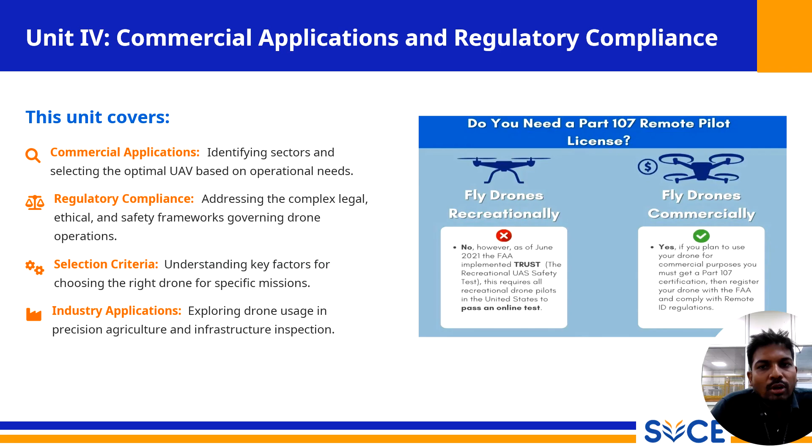Finally, you must comply with the Remote ID regulation. Remote ID is often called the digital license plate for drones. It requires the drone to broadcast identification and location information that can be received by others. This is a crucial technology for ensuring the safety and security of the national airspace, allowing the authorities and other aircraft to know who is flying where. So, the takeaway is clear. The moment you cross the line from hobbyist to business, a new and more rigorous set of rules applies, all designed to ensure safe and accountable commercial operations.

Now that we have established the legal foundation required to operate the drone commercially, the next critical step is choosing the right tool for the job. This slide introduces the most important principle in drone selection. The entire process is mission driven. There is no single best drone for every task. The optimal choice is always the one that is specifically tailored to the needs of your mission and the environment you will be operating in. The drone that is perfect for cinematic photography might be completely unsuitable for long-range agricultural surveying. Therefore, we must begin by analyzing the mission requirements and then match drone capabilities to those needs. Let's break down the key selection factors you see listed here.

First, we have range and endurance. This refers to how far the drone can fly from its operator and how long it can stay in the air on a single battery or tank of fuel. For missions that cover large areas, such as mapping a coastline or monitoring a long pipeline, you would prioritize a drone with extensive range and flight time. As the slide notes, this is where configurations like fixed wing aircraft often excel due to their aerodynamic efficiency.

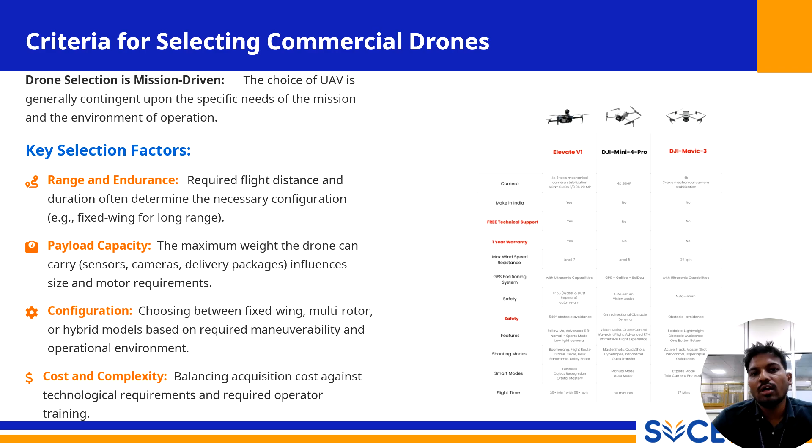The next is payload capacity. The payload is anything the drone carries to perform its mission. This could be a high resolution camera for inspecting, a multispectral sensor for analyzing crop health, or even a package for delivery. The weight of this payload is a crucial factor as it directly influences the required size, power, and cost of the drone. A heavier payload necessitates more powerful motors and a larger frame. This in turn impacts the drone's overall endurance and budget.

The third factor is the drone's configuration. This is the basic design of the aircraft, and we'll explore this in more detail in the upcoming slides. The primary choice is between a fixed wing model, which is like a small airplane, a multi-rotor model like the familiar quadcopter, or a hybrid design that attempts to combine the benefits of both. Your choice will depend on whether the mission requires hovering stability, vertical takeoff and landing, or long distance efficiency.

Finally, we have the practical consideration of cost and complexity. The initial purchase price is only part of the equation. You must also account for the total cost of ownership, including maintenance, software, insurance, and the necessary level of pilot training. A highly sophisticated drone may offer incredible capability, but it also demands a more significant investment in both money and skill development.

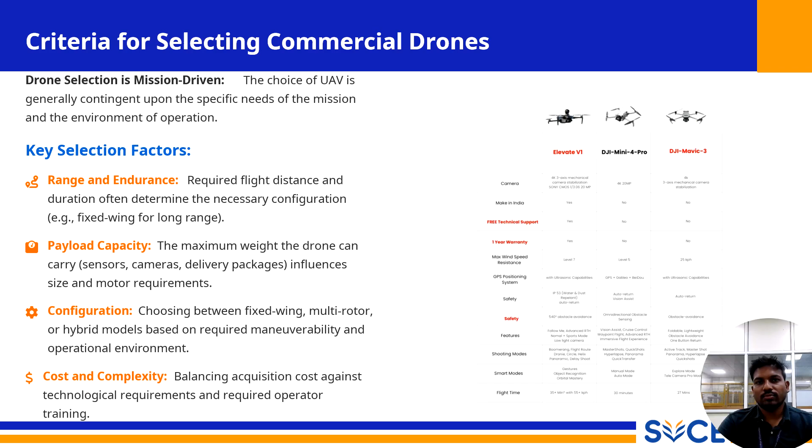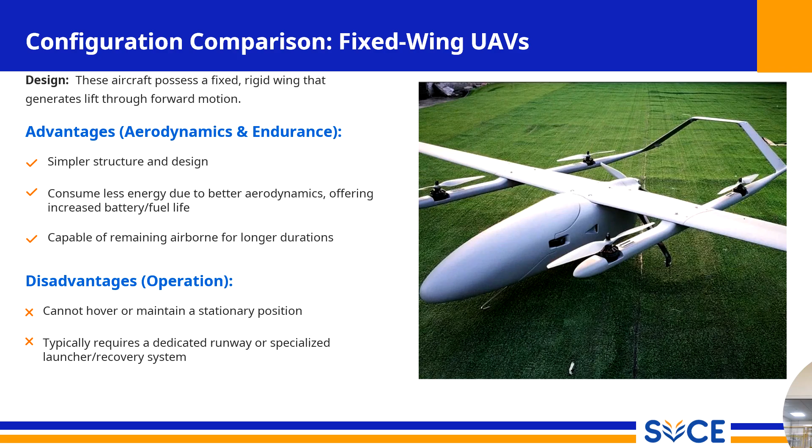First, let's look at the technical challenges. This industry is in a constant push for increased reliability, extended capabilities, and improved ease of use. Increased reliability is absolutely critical. For drones to be trusted with valuable payloads or to operate in close proximity to people and infrastructure, they must be exceptionally dependable. This means designing systems that are resilient to component failure, software glitches, and environmental factors like high wind or signal loss.

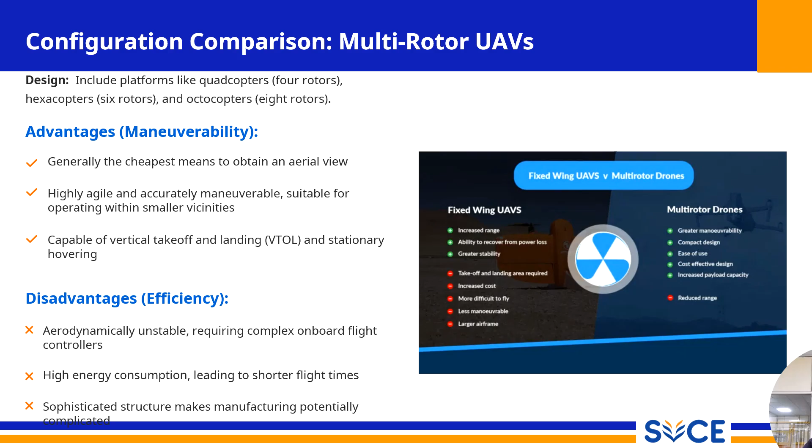First, we have the fundamental system components. This starts with the most obvious part, the unmanned aircraft itself, which is the physical airframe. This includes the body, wings or arms, motors, propellers, and everything that makes up the physical structure. This is the hardware that actually moves through the air. The brain of this hardware is the autopilot, which is the onboard computer that executes the flight software.

To understand its environment and its own status, the drone relies on a suite of sensors. These are the drone's eyes and ears, which include an inertial measurement unit (IMU) with accelerometer and gyroscope, a GPS for location, a barometer for altitude, and a magnetometer for heading. However, the raw data from these sensors can be noisy or inaccurate.

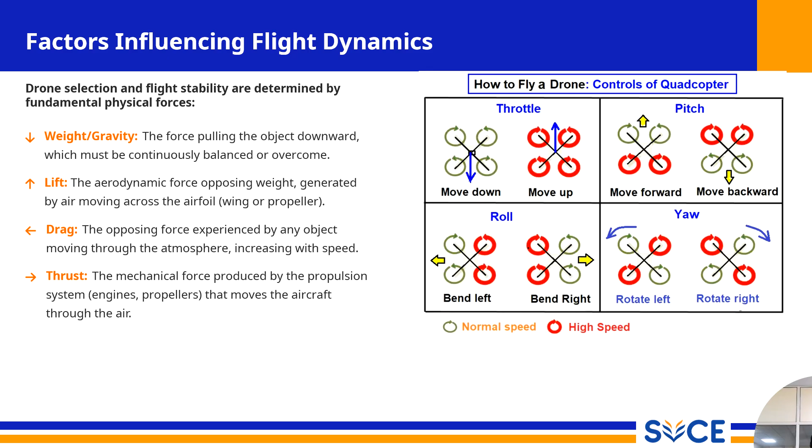This modularity makes the system easier to develop, debug, and upgrade, as engineers can work on individual blocks without having to redesign the entire system. Ultimately, this brings us to the core of our unit: beyond the hardware, our focus will be on the design of the software algorithms that enable autonomous and semi-autonomous flight. It is the sophistication of the software, the state estimators, the planners, and the controllers, that truly defines the capability of the modern MAV.

Having laid out the architecture of the MAV, the next logical question is how we actually design the intelligent software that runs on it. The answer lies in our design philosophy, which is centered on the principle of modeling for control. We cannot control what we cannot describe. Therefore, our first step is always to create a mathematical representation of the drone and its environment. Our process begins by translating the physical system into a simulation. To do this, we need to create a detailed mathematical model that captures every important aspect of drone behavior.

This includes modeling its rigid body kinematics, which describes the geometry of its motion, its position, velocity, and orientation, without considering the forces involved. Next, modeling its dynamics, which is where we apply physics to understand how forces and torques cause the drone to accelerate and rotate. We must develop a model for aerodynamics, which accounts for the complex forces of lift and drag generated as the drone moves through the air.

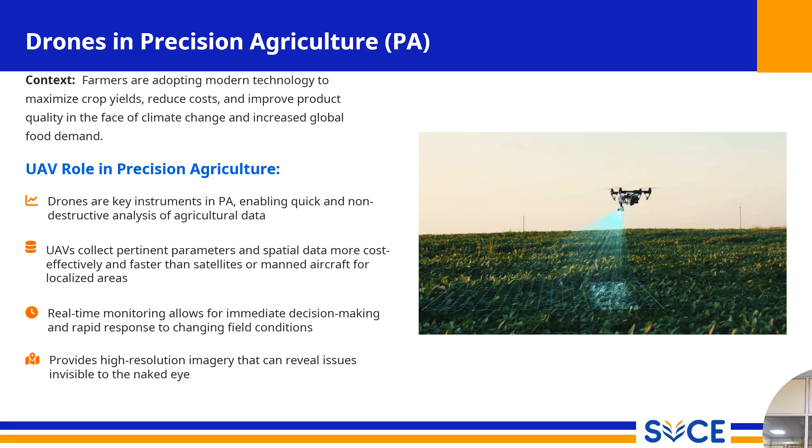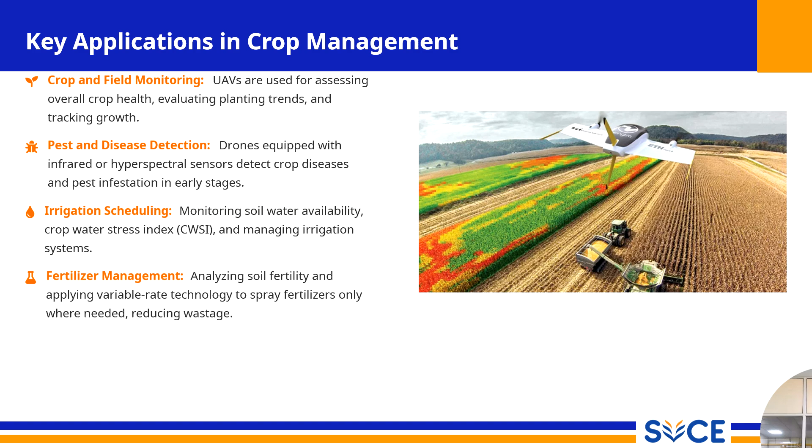Now that we have established the need for coordinate frames, we need a practical way to describe the drone's orientation within those frames. This brings us to the most common method for representing an aircraft's attitude, Euler angles. This is a mathematical language we use to define how the drone is tilting or pointing in space. Euler angles consist of a set of three rotations: roll, pitch, and yaw.

Let's define these intuitively. The roll angle, represented by phi, describes the rotation around the MAV's longitudinal axis, the line running from its nose to its tail. This motion would be seen as the wings banking left or right. The pitch angle theta is the rotation around the lateral axis, which runs from wingtip to wingtip. This corresponds to the nose of the aircraft tilting up or down.

Finally, the yaw angle psi is the rotation around the vertical axis, causing the nose to turn left or right like a car steering. Together, these three roll, pitch, and yaw angles describe the aircraft's attitude relative to the inertial frame. Essentially, any possible rotation of the drone can be described by some combination of these three numbers.

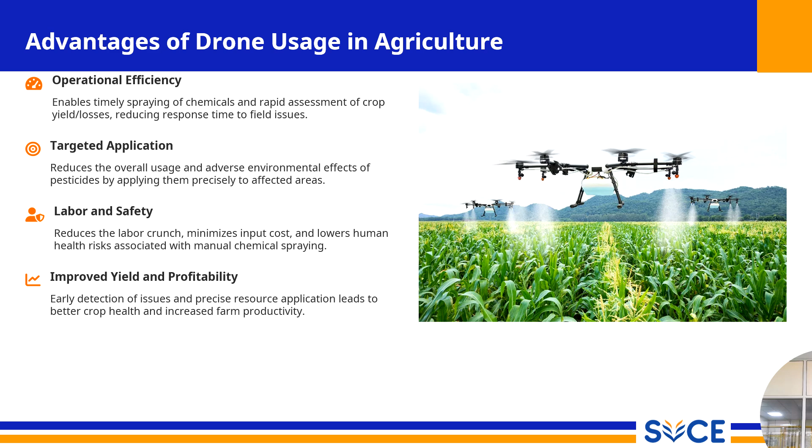So far, we have discussed how to represent the MAV's orientation or attitude using Euler angles. Now, we need to broaden our perspective to describe the MAV's total motion through space. This is the domain of kinematics, which is the formal study of motion without considering the forces and torques that cause it.

We define the position using three coordinates: north, represented as Pn, east, represented as Pe, and down, represented as Pd. These coordinates are all measured relative to the inertial frame. This means we have a fixed starting point on the ground, and we measure the drone's position as distance along these three axes from the origin. The north-east-down, or NED, convention is standard in aerospace and gives us an unambiguous global position for the aircraft.

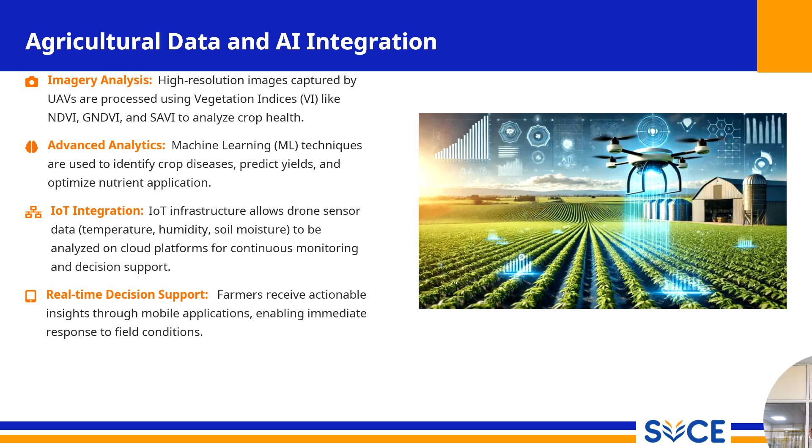Now that we have the language of kinematics to describe how MAVs move, we can advance to the next critical topic, dynamics. While kinematics answers how, dynamics answers why. This is the study of the forces and moments that cause the motion we observe. This is where we apply the fundamental laws of physics to create a model that can predict the MAV's behavior.

These forces include gravity, the thrust from the propellers, and aerodynamic forces like lift and drag. By summing these forces, we can determine how the drone will accelerate and move through space. Similarly, for rotational motion, the sum of all external moments or torques is equal to the drone's inertia matrix multiplied by its angular acceleration. These moments, such as those generated by the differential thrust of the propellers, are what cause the drone to roll, pitch, and yaw.

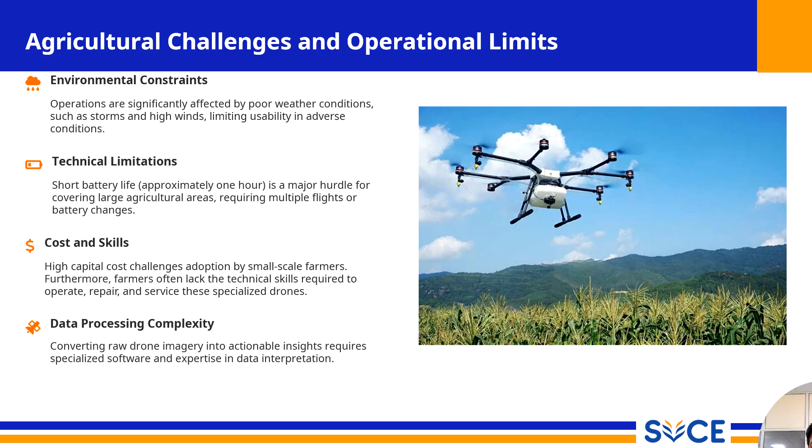First, we'll consider gravitational force. This is the simplest force to model, but it is always present, and the control system must constantly work to overcome it. The gravitational force, which can be denoted by F sub g, is proportional to mass and the gravitational constant. This is simply the weight of the aircraft. A heavier drone requires more thrust to hover. This force is also predictable in its direction, as it always acts in the downward direction relative to the fixed inertial frame.

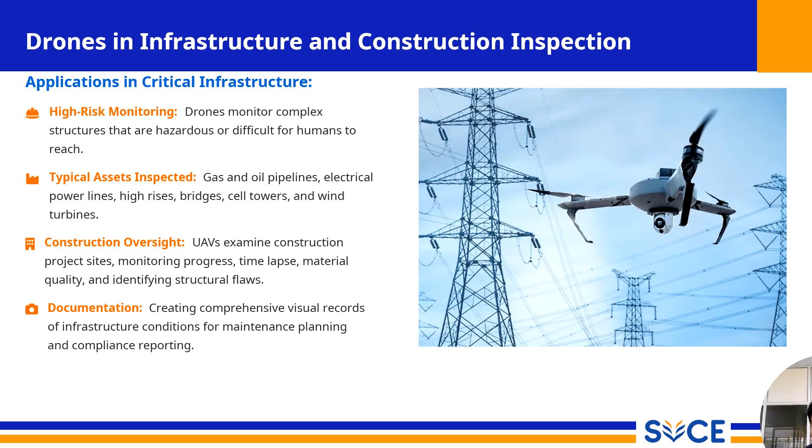It is important to note that this torque is proportional to the square of the propeller's angular velocity. This means that if you speed up a motor, the reaction torque increases as fast as the thrust does. This nonlinear relationship is a key characteristic that the flight control software must be designed to handle precisely.

As the aircraft's body, wings and propellers push their way through the air, they create variations in air pressure around them. The sum of these pressure differences results in a net force on the aircraft, which we can then break down into more useful components. The first component is lift, denoted by F lift. F lift is defined as the force perpendicular to the airflow.

It is a common misconception that lift always acts upward; while it does counteract weight in level flight, it is truly defined based on the direction of the incoming air. For modeling purposes, this force is considered to act at a single point of the aircraft known as the aerodynamic center.